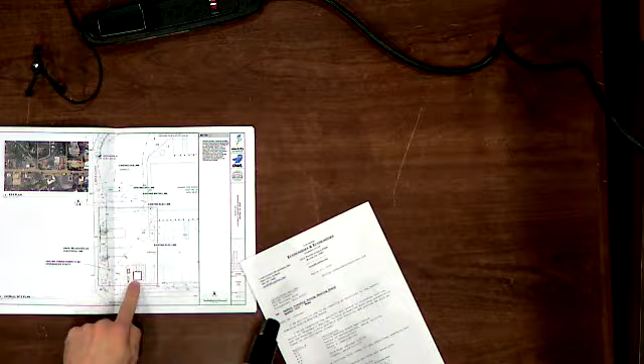Okay, so the gear we're proposing putting in the front of the store. Right now, we're not showing screening, but we could certainly put screening around it. The proximity to the existing transformer makes this the best spot because it limits the disturbance to the public, to the store, and it's the shortest run.

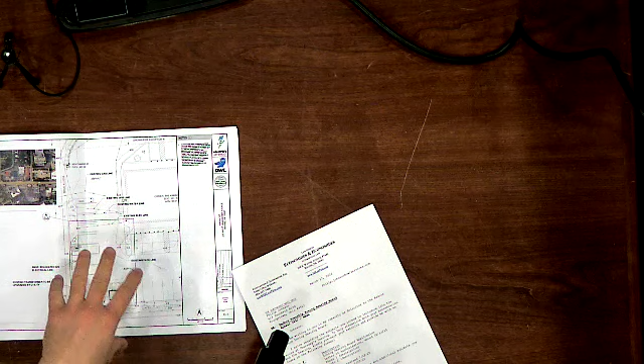I've actually been to this store a couple times. I stopped before. There's no good spot behind this store due to an existing fire lane. People park there, and putting it in the back of the store would disturb the fire lane and the flow of traffic behind it. Wawa has chosen these two spots because they're underutilized and they're in that corner.

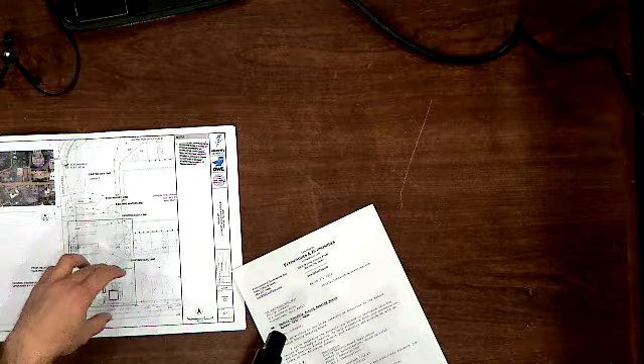That's what they told me. Describe anything about that parking lot as underutilized? Like I said, I've been there twice. It was not on peak hours, so forgive me if I misspeak on that.

But they're looking at it as adding an amenity. We don't have any proposal to put electric vehicle parking only. They're not going to really enforce that. But obviously, they want people to utilize it for a charge.

When you say they're not really going to enforce it, are you saying that if somebody pulls into Wawa and pulls into the charging station but isn't going to charge their car, just going to go in and buy coffee, get a hoagie, buy milk, whatever else they have in there, you're not going to boot their car or tow it away? No, they're not going to call a tow truck. They're not going to boot them. They're not going to ticket them. They can't ticket them. It's just courteous.

I've parked at them before and ran in the store and been out in 5 minutes. So no, they're not going to put electric vehicle parking only on those. Would they want them to be? Probably, but it's not going to be enforced.

So we do understand that because they're not standard stalls, you're losing existing stall count. But the big stall count loss is from the new transformer and the new switchgear. We've looked at other spots on the property. On the other side of the store, you have that shared driveway access, and you would create a queuing issue, and it would not be good. We've looked at this area, and due to the underground conditions and the fire lane in the back, this is the best spot for these chargers.

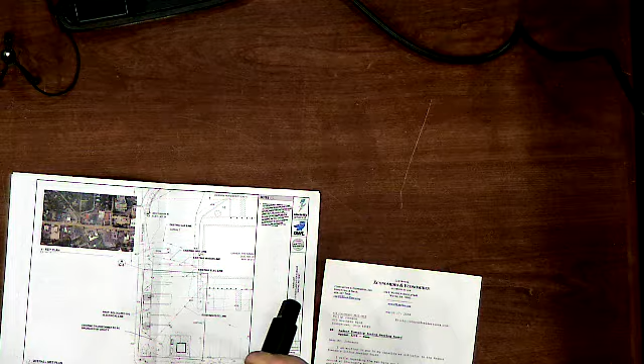So I know we haven't identified any exhibits yet, but on the plan you have open on the table, can you show me where the existing building is in relation to these parking spaces? Here's the existing building, and the main entrance is on the east side. Is it marked on the plan? No, the drawings are inadequate.

I have another question, but I'm going to move on. I have a feeling you're going to need a continuance, but again, we can't give you advice.

Are you going to be able to address the volume of vehicles and how the loss of 7 parking spaces is going to impact the project and the use of the Wawa? I don't know where we could put more spots because of that fire lane behind the store. I understand you're capped out, but that doesn't mean this project just gets granted. And I think a relevant question I certainly want to know the answer to is the loss of 7 spaces.

What's that impact going to be on the Wawa? As it is now, you go in there at 12:30, there's nowhere to park. You sometimes have to sit and wait so that you can go in. So if you're not prepared to address that... that's up to you, we can certainly proceed.

At this point I would definitely like to request a continuance, because, like I said, the gentleman just left the company. I had to pick this up, and without giving you any advice, there's issues with the material and the presentation and what you need to do and what you need to prove to show that you're entitled to a variance, okay?

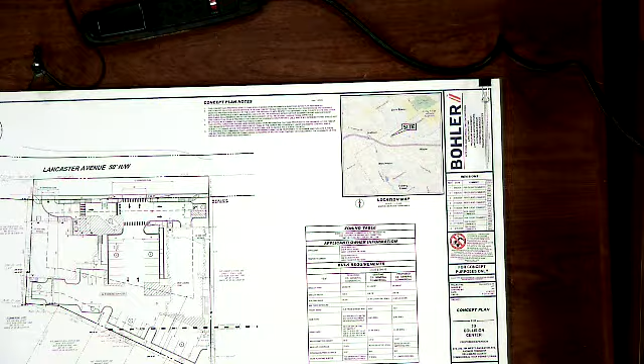Exhibit A1 is an aerial of the site. Our property, the 3 separate properties, are located on the southern side of Lancaster Avenue. The existing auto repair shop is shown as 3D Auto Body. There's a retail building in the middle, and to the right of that is the former restaurant building. The retail building and the restaurant building have been vacant for about the last 10 years.

The auto repair, as our client has owned it, has been there since 2011, I believe, but as previously mentioned, it was used as a motor vehicle repair shop prior to that. They had received a variance back in the 80s to do a small expansion. What we're looking to do is basically a facade upgrade to the existing motor vehicle repair shop, demolish the middle retail building, and renovate the old restaurant building to locate some of the motor vehicle repair services there.

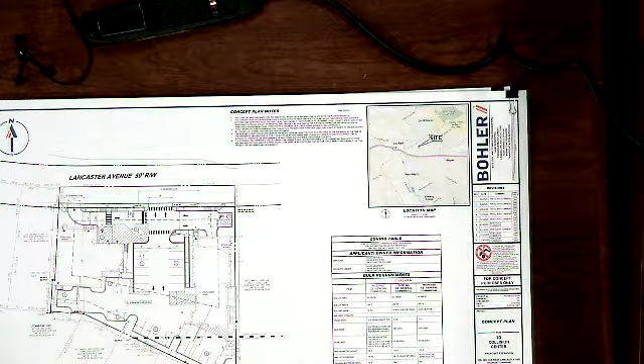Exhibit A2 shows the existing conditions. Exhibit A3 is a concept plan that shows the proposed development. Exhibit A4 is the proposed elevations showing what the new buildings will look like, with a dashed overlay comparing it to the existing building in terms of height. Exhibit A5 is the proposed floor plan. Exhibit A6 shows the proposed rendering as compared to the existing conditions today.

Exhibit A8 are photos that were included with the zoning application package. Exhibit A9 is a transportation impact assessment, done in anticipation of us submitting a land development application for the project. Exhibits A10, 11, and 12 are the CVs for our experts, so you can reference those if you need.

Going back to A1, I see you've got the 3D auto body shop identified, there's a small store, or what was once a store next to it, and then there's the old restaurant. And then next to that, is that another older building attached to the restaurant, what had been the restaurant? There is another building, but that is not on our site.

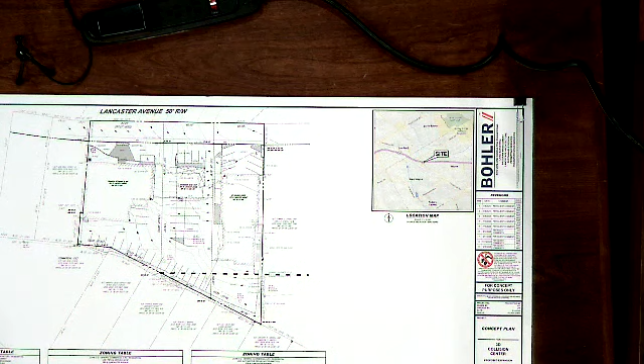So the existing conditions plan is the first plan prepared. This shows the 3 parcels, all the existing conditions, the existing zoning calculations for the property. The second plan, which we'll get to in a little bit, is the proposed site plan, which shows the consolidation of the 3 lots, the removal of the building in the middle, and then the reconfiguration of the site proposed along with this application.

And you're familiar with the properties and the general operations of the existing business, correct? Yes. Can you now identify and describe the existing conditions? Sure. So I will start from my left and go to the right. The property on the left is the 384 property, the vacant restaurant building.

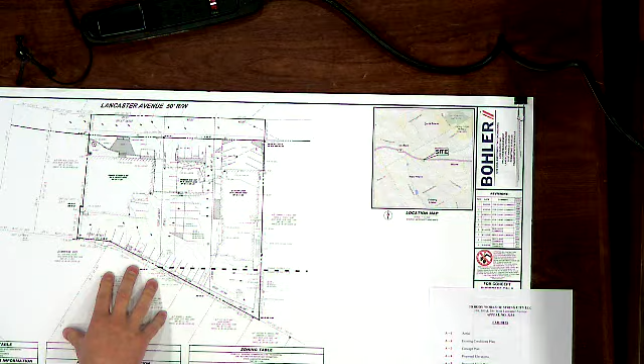All three of these properties have a series of nonconformities, so I'll go through them one at a time. 384 is nonconforming for lot area, lot width, building area, side yard, rear yard, lot coverage, and the rear planting buffer. In addition, parking in the front yard, loading area, parking space dimensions, and number of parking spaces. Those are the current deficiencies for the 384 lot.

The 380 lot, which is in the center of the site, is the vacant retail building. This has a few less nonconformities, but is nonetheless nonconforming for lot area, lot width, side yard, lot coverage, rear planting buffer, parking in the front yard, loading area, and parking space dimensions.

And similarly, 378, which is the existing building that 3D Bodyworks operates currently, is nonconforming for lot area, lot width, building area, side yard, rear yard, lot coverage, rear planting buffer, parking in the front yard, loading area, parking space dimensions, and parking count.

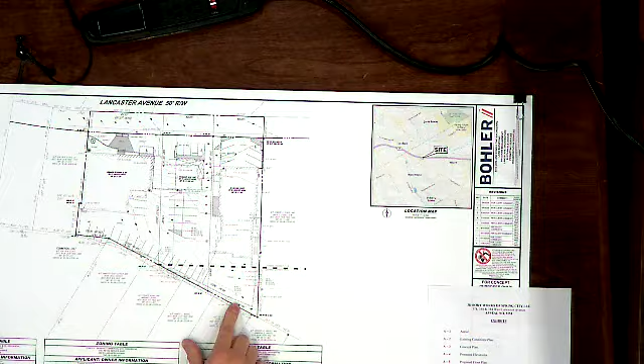Can you now describe the proposed conditions, including the consolidated lot and the proposed improvements, as well as the elimination or reduction in any nonconformities? Absolutely. So, as Jamie had mentioned previously—

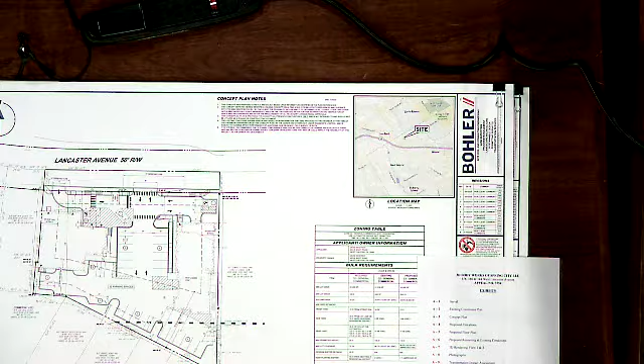So as part of this project, we are also proposing to get rid of that wide open frontage and consolidate it into two defined access points. The main ingress-egress access point is in the center of the property, which would have been essentially where the old retail building is now. And then there's also an egress only, and ingress only, to the left side of the property.

Customers, when they've scheduled an appointment to have their car repaired, would pull in, drop their vehicle off at that office space, and then whatever arrangements they've made to be taken home or have a rental car, those accommodations would be made. The client would leave the site, and then the staff would then take the car and park it wherever it needs to be based on the work that's being completed.

So our traffic engineer will get into a little bit more of the traffic-related items as we go on here, but I just wanted to give an overview of that up front for some background on the access. So with that, I'll go through the reduction in the nonconformities for the site, or elimination.

So the use nonconformity is reduced from 2 to 1. The auto repair use is nonconforming, but there is also a residential component as an apartment in, I believe it's the 380 property, which would be removed as part of this application. So the residential nonconforming use is removed as well.

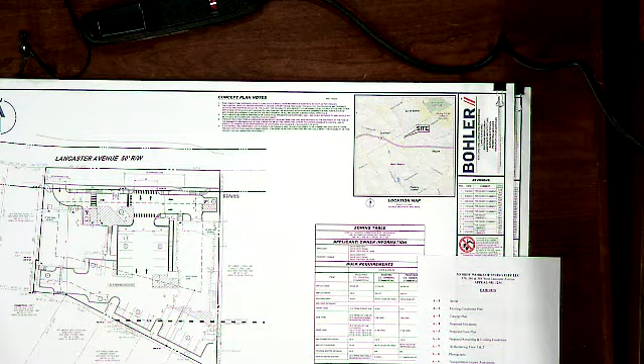The lot size and lot width nonconformities are eliminated by the consolidation. Building area, same thing, is eliminated by the consolidation.

The impervious surface nonconformity is reduced—if you considered all three of the existing lots as one, the impervious coverage is like 96.7%. So the consolidation and improvements here reduce that nonconformity down to 88%.

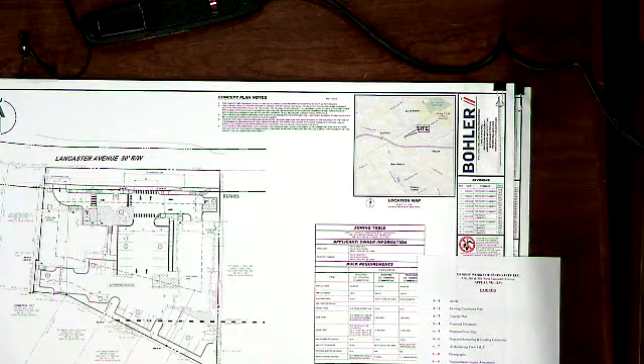The rear buffer nonconformity is reduced. This is something we talked about with the Planning Commission. As it exists today, the parking in the back of the site—I'll just flip to Exhibit A2 for a second. Got both my boards.

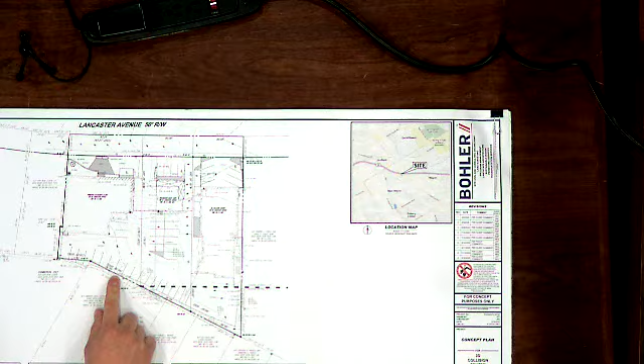The parking in the back of the site kind of ducks and weaves here, but it crosses onto the residential properties in the back, so the parking overlaps. There is really no buffer yard to speak of back there. There is a 15-foot buffer requirement, which is nonconforming in this condition.

What we've proposed to do, based on feedback from the Planning Commission, is provide this: there's going to be a 7-foot buffer that gets provided along the back here. There is a pinch point where the property takes a bend here, which maintains about a 1-foot buffer from the property line, which is less nonconforming than the current situation where it is like 6 or 7 feet across the property line.

The parking in the front yard nonconformity is reduced in both the number of spaces and the proximity to the right-of-way. As it exists today, essentially people can just back straight out onto Lancaster Ave there—there are parking spaces that are right along the right-of-way. So as part of consolidating the open frontage into driveways, it reduces the number of spaces and the distance.

The loading area nonconformity is eliminated—there is a dedicated loading zone that's provided. The parking space dimension nonconformities are reduced; some of the existing parking spaces on that property are currently like 7 by 14 feet for some of them. And the number of parking space nonconformity is reduced as well.

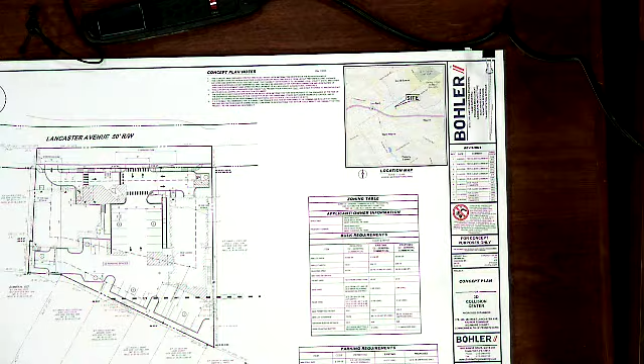I appreciate understanding what the improvements will be, the reduction in the nonconformities. But what I'm really going to need at some point is a comprehensive list of all the relief that you need in order to make this project work. That's not to say you'll get it, but I need to understand what we're doing here as a board.

Right, and the list was reviewed at the beginning. Well, I didn't hear Mr. Yeager mention impervious coverage currently is 96 and some odd percent, and it's reduced to 88%. Do you need relief for that impervious coverage? We have spoken with the zoning officer prior to filing this application because we wanted to make sure we were incorporating everything. I think there were determinations made that stated if we're decreasing the nonconformity, we do not need to specifically seek relief.

But there are things where, in terms of the parking in the front yard, I felt that also is not necessary, but just to be on the safe side, we have asked for it if and to the extent required. So in terms of the impervious, no, we have not specifically asked, but we do have that catch-all where it says any and all other relief necessary. We have not specifically asked for the impervious because it's a non-conforming situation that we're actually making better.

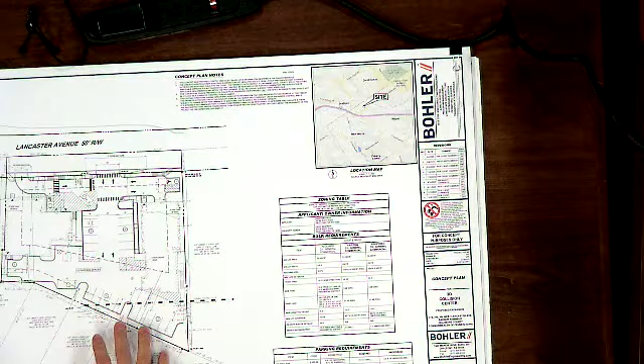As Jamie mentioned earlier, the hours of operation for this facility are 8 to 5:30 or so, so there's no expectation of having lights on in parking areas during sleeping hours.

Were there any other dissenting comments that stood out? No, and actually one of the members from the design review board was there as well, and was pretty supportive of seeing something happen here.

Regarding the parking here and those lights, is there going to be any screening with the rear parking spots given your adjoining southerly neighbors? Yes, that was a comment the Planning Commission brought up. They gave us a recommendation for a certain species of giant arborvitae, but the intent with that space would be to put some sort of fence first along the curb line and then buffer it with arborvitae or a plant of similar species.

Regarding existing conditions versus what's proposed, are you going to be removing existing paving, grinding? Is it basically a full redevelopment? I know you're demolishing one building and renovating two. That's correct, it's renovation of two existing buildings, demolition of one, and then full resurfacing as well.

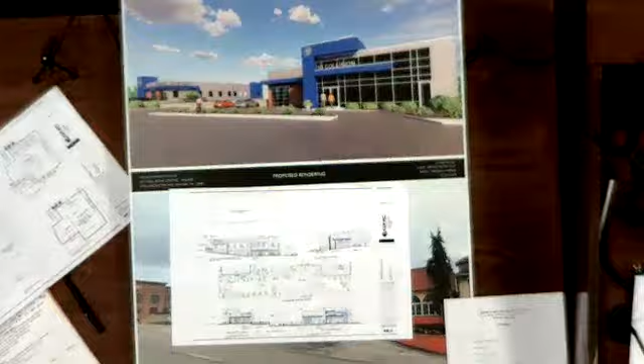Okay, so this is an elevation drawing, exhibit A4. This is a view looking at the building as it stretches out the entire site across Lancaster Avenue. The building on the left is the shop building, which gets reclad, and I'll go through the renderings later. Basically you can sort of faintly see the dotted outline of the building that's there with the little mansard roof on it. So we're about the same height as what was there, a little bit higher at the tower.

I think the tower goes to, I think it says 30 feet. The building in the middle, of course, is removed, and that becomes a landscape area and access in and out of the site as it steps down. On the right-hand side here, this is the proposal for the new building that will be where the restaurant currently is. That building will also look very similar to the cladding on the shop building.

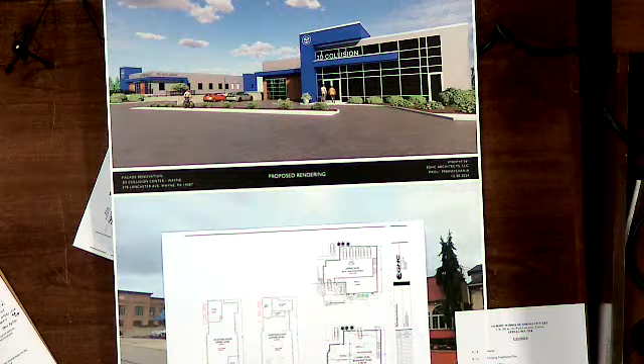So this is the floor plan exhibit, exhibit A5. This building on this side is the existing shop building, and there's a small office here. You park up front, bring the vehicles inside, work on them, take them out. There's a lower level, which is accessed from down below the site through an overhead door, exactly the same footprint as this building above. That will all remain as is. We really haven't done much with the interior at this point, we've just been focusing on the exterior of the building.

This building is the lower level of the restaurant. We are keeping that as is. I'm sorry, over here, we are going to remove this corner on the lower level and the upper level to provide more room and parking and ingress egress up above. We'll reinforce these walls, modernize it. The lower level will become a shop and a paint shop. The upper level, you've got about 1,100 square feet, which becomes an office space. Stair going down, egress out the front, and also vehicle storage for 5 or 6 cars.

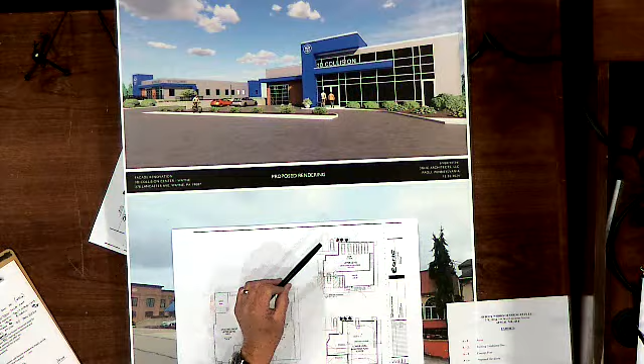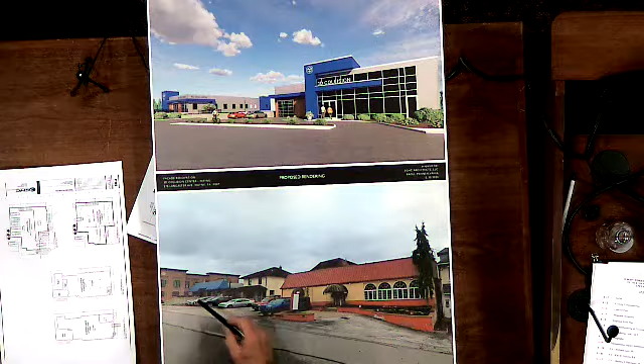So is this the before and after? Okay, so this is exhibit A6. Obviously this is the front view of what's existing. So this is the shop building over here, this is the retail building, I guess it was an apartment above, being demolished. That becomes a new ingress, egress into the back of the site.

This entire portion of the restaurant building will be removed along with these planters. It's in terrible condition right now. And so this building ends up looking like this. It'll be clad with an aluminum composite material, glass curtain wall.

There's a glass overhead door to bring the vehicles in, entrance into the office area for the public, short-term parking, handicap parking. This is the area that did contain the house, now gone, becomes a ramp and landscape area. This is the shop building, which currently is this sort of tired-looking brick building with this blue mansard front.

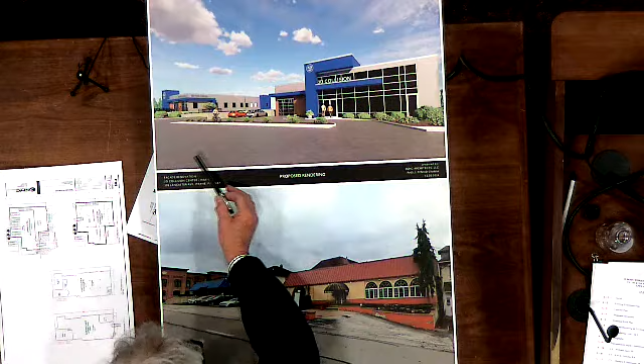Once again, it gets clad with Alucobond panels in a couple of different colors. This is sort of a wood-looking material. We'll get a little bit more planting, some railings, new windows to modernize it, and that's about it for that one.

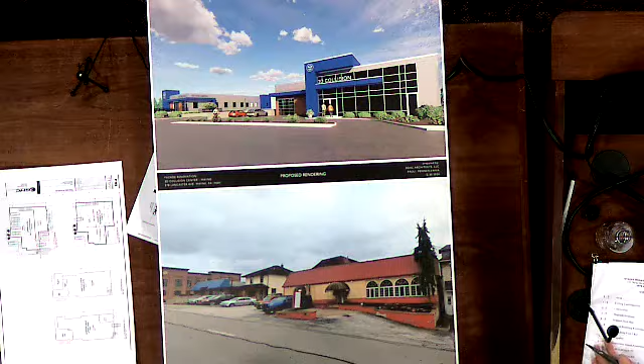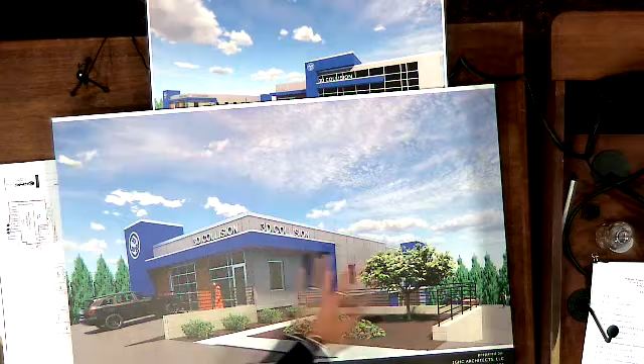So that's where the old mansard roof was. This was the kind of tired brick siding. And these are the new building cladding, tower element, signage, synthetic wood entrance, new glass door to enter the garage, new storefront for the entry into the office area. This space we picked up here will become a landscape area with a railing looking down below.

And I believe that view, too, is the same as what was on top of the proposed rendering and existing conditions, right? Yes. So there's just a question regarding the signage. You don't need any relief on the signage that's been discussed? We are not at this time. It's sort of a struggle as to how much you fully design and all the approvals you get. So if there is any relief that is required for the signage that's being proposed, we'll have to come back.

Okay, understood. Just to touch on that briefly, we've lowered these signs. This one has been lowered to this element here. This one is already, so these signs don't go above 15 feet.

What exhibit is that drawing? That is the A4. So Carl is referencing A4. That's showing the signage, with exception of this, the logos, which obviously are higher than 15 feet. But we're not here for signage, correct? No. Okay. Because it just happens to look good on here.

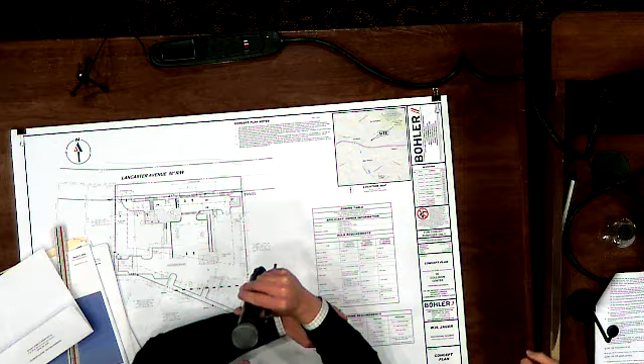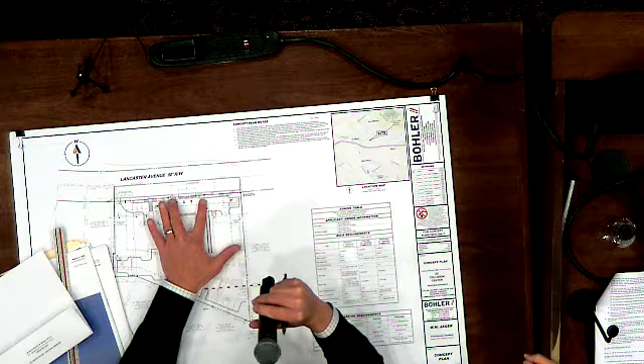One of the things we'll need to do during the land development as well as PennDOT process is show that emergency vehicles can access the site, as well as whatever type of delivery trucks, typically vans, can enter and exit the property. You'll notice this main access point has been designed as a driveway apron, which allows us to flare the radii out to give more room for larger vehicles to enter or exit the property without encroaching in opposing lanes of traffic.

But it is something that we'll need to show during land development. We'll need to have it reviewed by the fire marshal.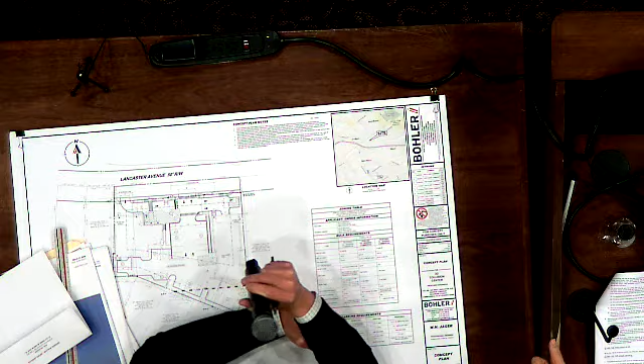Okay, understood. Yeah, I'm just thinking, given when you're proposing to expand the use, because I'm sure with an auto body shop you're having paints, solvents, other flammable materials that I'm sure are appropriately stored, of course, but just considering my thoughts is like getting fire trucks and other—It is, yes, sorry, I just wasn't close enough, thank you.

So I was just thinking in terms of the stated use and materials stored, especially the proposed expanded use here, just given access for fire trucks and other emergency services, but understood that would have to also go through a further process and revision.

No, yeah, good question. And as I said, if we're able to move forward to the land development process, I'm sure the township's fire marshal will review the plan and make sure they're comfortable with how it's designed, and if not, we'll have to make revisions. Understood, thank you. Thank you.

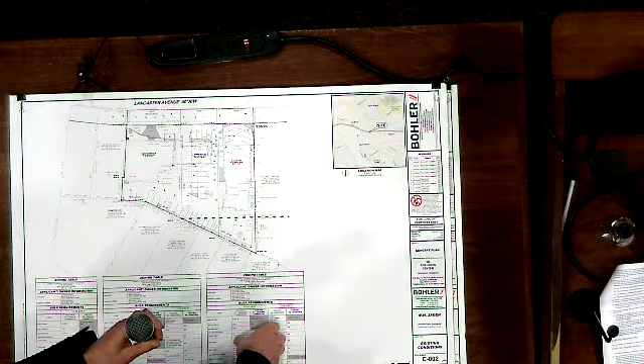So today there are 4, 5, 6, 7, 8, 9, or 10 parking spaces that are in that 20-foot setback that have direct access to backing out into the right-of-way. And you're reducing that then on A3 to just one spot in that 20-foot setback? That's correct, yes, the ADA stall for that building.

Yeah, so the auto body use, that's permitted? That is a non-conforming use that has existed for a long time. Our client, the applicant, purchased in 2011 and has continued that use. But again, because it's a use that has been there for so long, there is a great need to modernize.

And I just want to be clear - yes, and I'm sorry, I don't mean to be short. We've got a huge agenda tonight, I know. So, okay, so the auto body shop is an existing non-conforming use. That's correct. And you're looking to expand that existing non-conforming use into this restaurant building. That's correct, but the restaurant was a permitted use. That's correct.

Okay, and I'm sorry, it's going to be duplicative, maybe I took a note. The existing non-conforming square footage was - I don't remember what the number was. For which building, the restaurant? No, the existing non-conforming building. Okay, Will, do you have that?

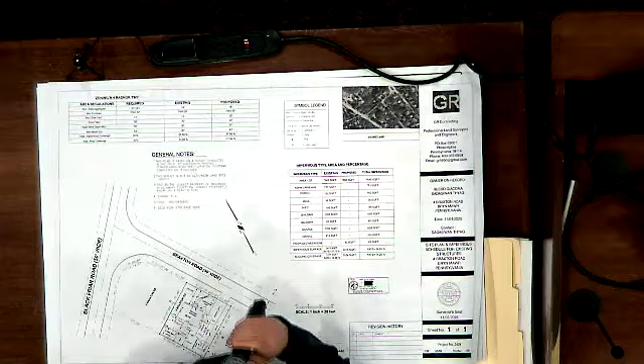Okay, sit down and do that, and we'll call the next one. How's that? I'm not sure exactly what you mean. Meaning you have all of the pictures and the testimony and everything there, so.

We do, but you're under oath to testify and refer to the exhibits you have to explain and justify why you deserve the zoning relief you're requesting, and you do that by referring to the various exhibits, including this drawing and the photographs. I think you were sitting here when you saw the other applicants doing the same thing, correct? I did. I don't have those exhibits here. I have given them to you, and they're in the PDF. So I apologize.

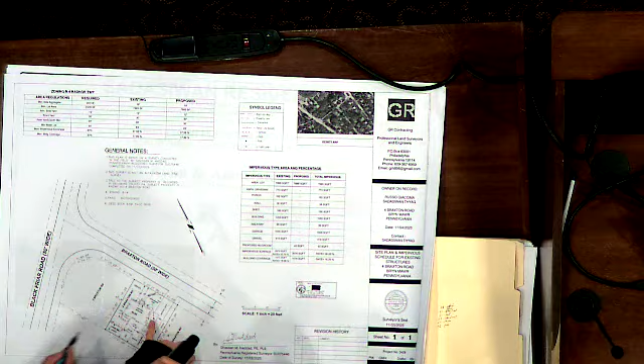Yeah, are you able to see that? That's really small. The numbers above it, parentheses 12.6, parentheses. So it's sitting right above. That's just a marker for you to see what I'm talking about. Okay, you're right in, okay.

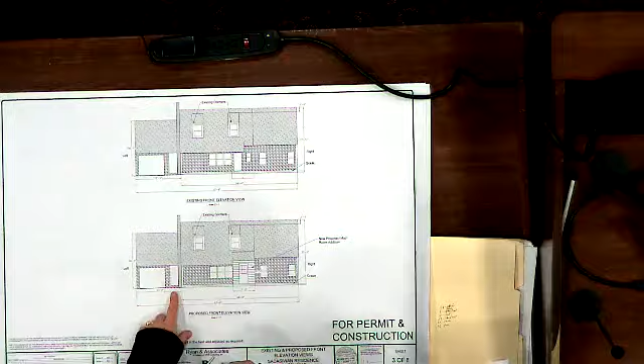It's right here, right? Is that shown in any of the photographs? I was looking at the photographs which we've marked, but I'm not sure what we marked. I really don't see anything that stands out. Actually, it is shown here. So if you look at where, I don't think we have that plan.

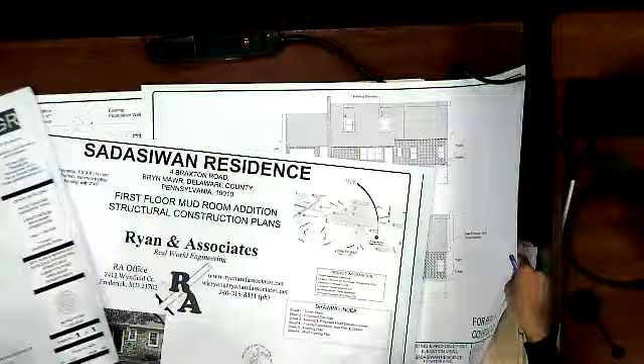Do you have that, do you have an extra copy of that plan that you have up on the screen, so we can add it to the file? If you have a copy for us... This is the construction plans I brought in case we needed them.

If you'd like, I can show you where. No, we need to see this. We need to see what you have down there, so the questions that have been posed by the board can be answered. So I would suggest you pass that up, or leave it on the table so we can see it on the screen. He only has the one copy, right? Correct.

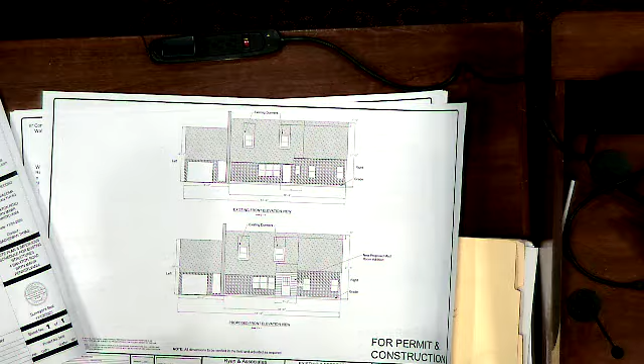Where did we mark this? A7. So I see you're indicating that... okay, so that door is on the front of the house then? Correct, next to the garage door. Here's the existing door, the existing front stoop with the proposed new mudroom.

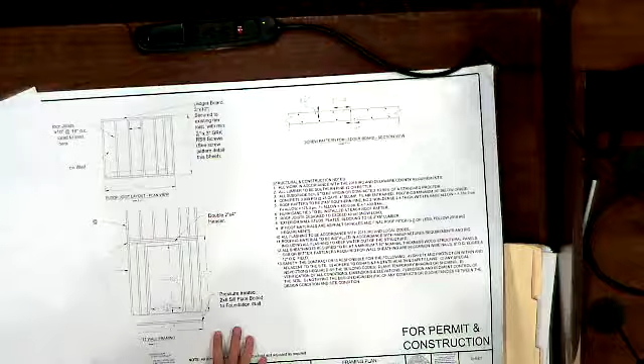And the proposed mudroom addition is this 6-foot by 7.2 feet extension? Correct. And the front yard setback required is 30 feet, is that correct? Correct. And you're proposing to go to 24 feet? Correct.

I don't have any further questions. Any other questions? Okay, sorry.

Do we want a copy of the drawings that we don't have? Yeah, we should have A7 up here, just that one sheet. The construction plans—I don't know if you need the whole set, we only reference that one page. Right, the one page, okay. This one? Yeah, so we should make that A7, but we'll need that for the file. Okay, thank you for your help.

Want to take us through the packet of photos, just briefly? Yes, put them on the table.

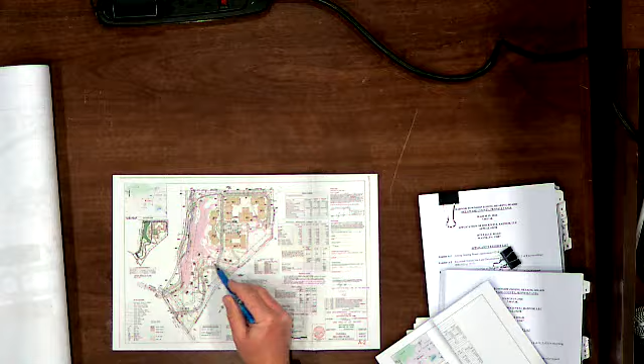Are you and others at your firm spearheading the construction of the proposed life care residence that's currently underway? We are. In addition, we're also general contractors, and we are subcontracting some of the work, the site work, to Brubacher Excavating, and then some of the independent buildings we're also going to subcontract. And what phase of the construction is underway right now? If you can see this map here, we started the spine road right up to about this area, and it'll take us approximately until sometime in May, June to get to that point before continuing with additional development up the hill.

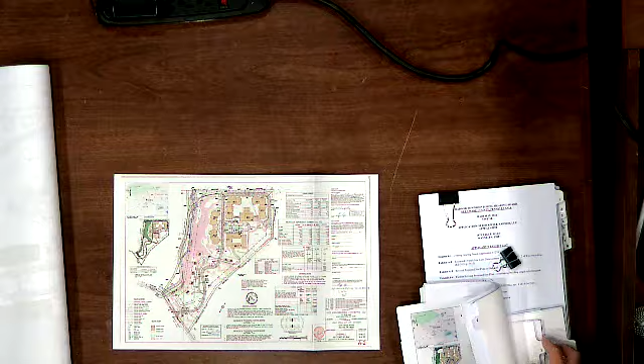Have you and your team been engaged with design professionals and other experts to refine the plans for the proposed life care residence? Yes. And is that what brings us before the zoning hearing board this evening? It is. At Exhibit A3, I'll put a copy up here. Is this the plan that we filed initially with the zoning hearing board for this application? It is.

Have these plans been revised, particularly this upper part of building H1, to make it comply with the 160-foot length requirement? Yes, it does now. So we're essentially substituting that plan with A4, is that correct? Yes. And this plan is basically the same, except building H1 has now been revised to meet that 160-foot length requirement, correct? That is correct. So the only relief we're seeking is regarding the steep slopes, which Mr. Lambert will be talking about, right? Yes.

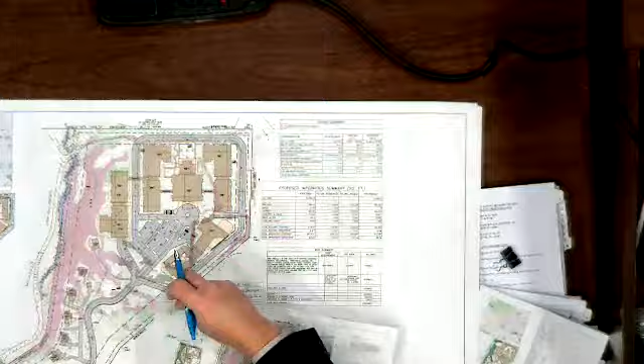Using this plan, A4, would you describe the proposed modifications to the previously approved plans that have triggered the need for the steep slope relief that's now being requested? Yeah, I'm going to start with the previous plan that was approved, which is A2. This shows, as you drive up the main road here, there will be independent units here, an amenity center here, and some independent living units here.

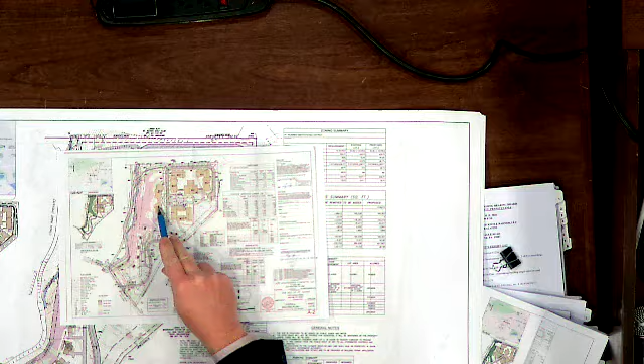And then this area was going to be for more of the health care, for the personal care and memory care building. The feedback, we feel like we've hired some of the best experts in the industry, and as we were developing this plan 3, 4, or 5 years ago, we didn't know exactly how the different buildings should be configured.

We've since hired Vantage Point Retirement Services to be our operator for this project, and based on their input and input of many others, specifically also our architect, they said that as you come up here, we really should be moving this personal care, memory care building a little bit off to the side, so that as you are driving up from a vantage point, you're looking at the amenity center.

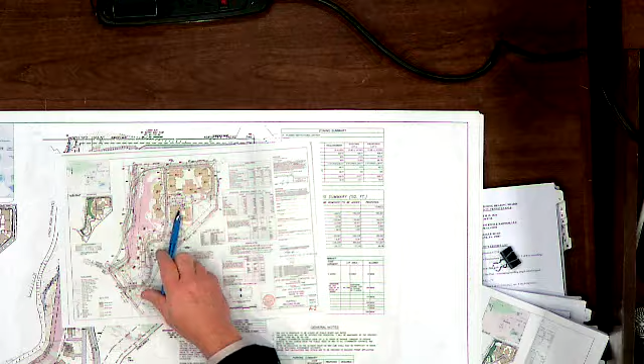So it's going to be certainly a more grand entrance, but in addition to that, this plan currently, as you see it, that we had approved, the road comes around here and it just kind of cul-de-sacs. The feedback that we've gotten from the operators about circulation, and then even some life safety folks, said it would really be helpful to have that road connect.

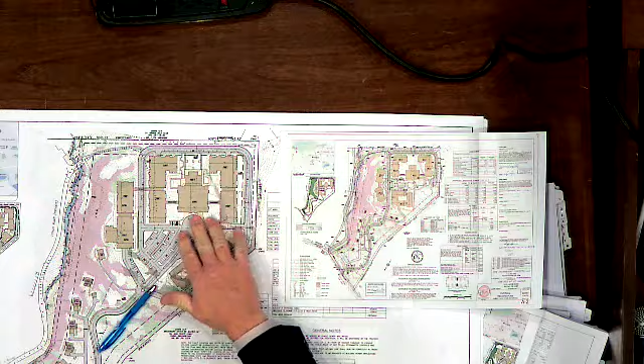We're looking at nothing changes. Now you're back to A4. Sorry, now I'm back to plan A4. And as you continue up this road, really nothing changes until you get to this point where we have slid the personal care, memory care building over, and you're looking more at that kind of grand entrance of the community. We feel this is really needed for this luxury product that we're building.

And then you'll see here that it helps with the circulation that this road now connects. And in doing this, we interrupt where there used to be a swimming pool here, and there used to be a home here that was graded off. Rob Lambert will talk about the steep slopes.

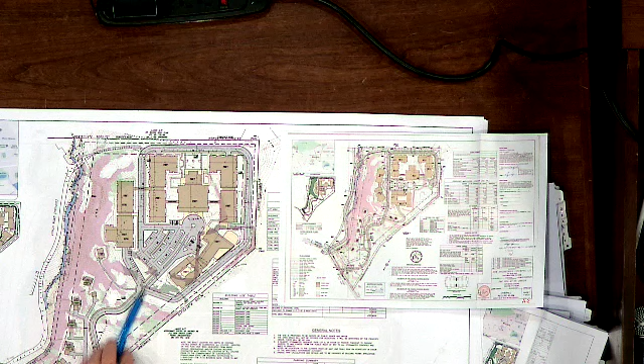Was this plan presented to the Radnor Township Planning Commission for review on March 2nd, 2026? Yes. And did the Township Planning Commission vote to recommend approval of the requested relief? Yes. That's all I have for Greg at this time. Rob Lambert will be going over the plans in more detail, and particularly the steep slopes.

I just have a quick question. It actually looks like you've improved parking as well. Is that correct? Correct. Yeah, I noted in the application that there's more parking on this plan than there was, so the extent of the parking variance would actually be reduced.

I just have a question. Maybe this is for the next witness, but is there any increase or decrease in impervious coverage, any issues regarding that, or are we still within the bounds? Rob will answer that. Sure. We should have him sworn. Understood.

I do. Rob Lambert. So the question was on impervious coverage. Yes, this plan continues to conform with the ordinance. Okay, great. Thank you.

Should I move on, or are there more questions for Greg? Okay, Rob, you've been sworn in. In the exhibit package at A5 is a summary of your educational and professional background, correct? Yes, that is correct. And I'm sure the board knows that you're a licensed professional engineer in the Commonwealth of Pennsylvania. I am. I'd like to offer Rob as an expert in civil engineering and land development.

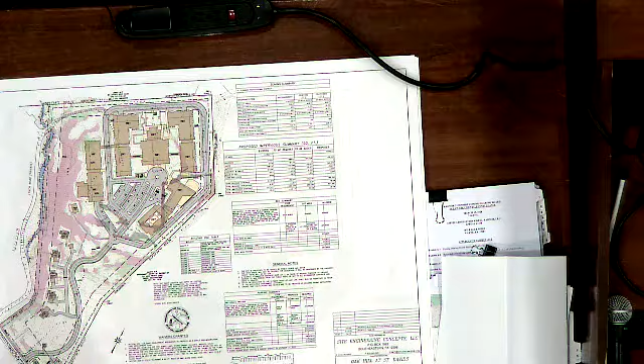Looking at Exhibit A4 on the left-hand side, you can see the blue line going kind of top to bottom of the page, a little bit circuitous. That is a creek that originates up by St. David's and goes down to Eagle Road, which is in the bottom left.

On that left-hand side, you can see the extensive area of pink. That's a steep slope that comes up from the creek area up to the developed portion of the property. The other areas you see sporadically through the property were a result of previous development. You likely had a slope that was less than 20%, but then they put in houses, tennis courts, a swimming pool that we'll get into, and created the large flat areas.

In order to get the large flat area under 20% slope, you created steeper slopes in between. The interesting thing is the Radnor ordinance allows slopes created in conformance with the ordinance, and the way that's been interpreted is post-1978. So if you had a plan that proposed those slopes today, like if Valley Forge had built this in, say, the year 2000, we wouldn't be here tonight because all those slopes could be disturbed. Many of these slopes were simply constructed before 1978, and we don't have plans of them, so we need to seek relief.

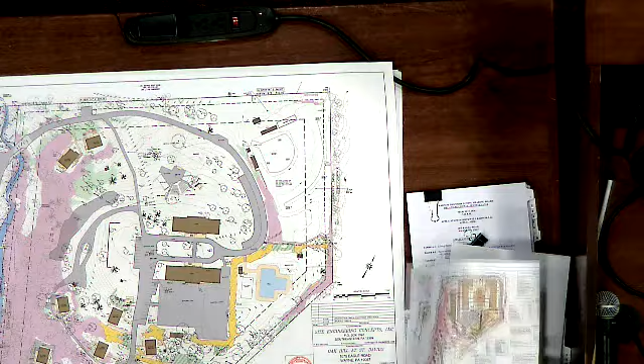Yes, so this is Exhibit A6. This is an enlargement of the previous plan. If we take the top half of that, the top of the page is St. David's Golf Club. To the left is Valley Forge Military, and to the right is Villanova Cabrini. You can see the blue area on the left-hand side — that's the creek mentioned previously. The large pink area to the left is the natural slope that was mentioned. So the brown areas on this plan are the buildings that existed.

Many of these are torn down at this point. The gray areas are existing pavement. There's a blue area to the right, which was a swimming pool, and a tan area surrounding that was the patio around that pool. So what I've done on this plan is taken the pink areas and highlighted the areas where we're seeking relief in yellow, just for ease of viewing. You can see the general areas, and I'll start off with the left-hand side and work my way to the right.

So you can see on the left-hand side, there were two dark brown areas toward the top of the page and the bottom of the page of that yellow area.

And those were two previous dwellings. You can see where they had those dwellings, they created a steeper area in between them to be able to have flat areas for the dwellings themselves. Going to the right, you can see a similar pattern with the two brown buildings, labeled two-story dwelling and two-story dwelling.

There's a band of slope in between those. I'll show pictures in a minute, but that is the same configuration, where right along where those buildings were constructed you have a small band of steep slope.

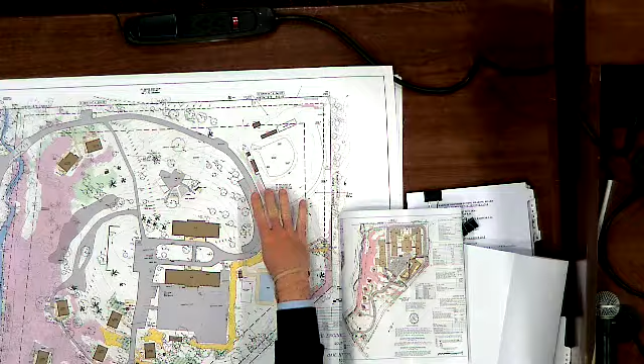I just wanted to clarify that those aren't being preserved - they're just not subject to the ordinance. They're being disturbed, but they don't need relief to be disturbed, correct? Correct.

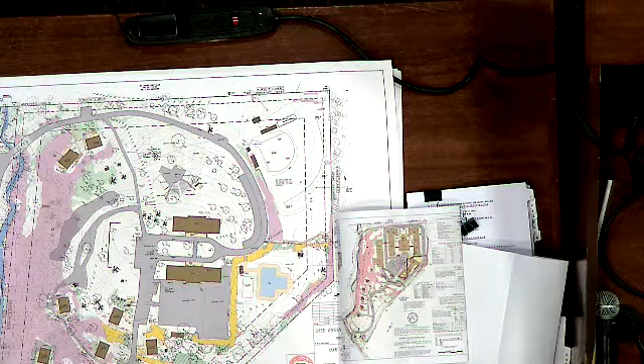So I don't know if we're going to get into pictures. Yeah, at Exhibit A7, did you assemble some old photographs and some new ones to be representative of some of these areas of slope?

Yes. Go through them, referring to each exhibit number please. So I think I actually did these right to left now that I look at them instead of left to right, so I'll kind of go backwards.

So the first picture is Exhibit A7A. This is an older picture from when we first started working on the project. This was taken standing in between the two longer brown buildings, looking toward the swimming pool. You can see the swimming pool that's fenced in - it's empty in this photo. You can see the set of steps in the photograph, and the roof of the building and the side of the building to the right.

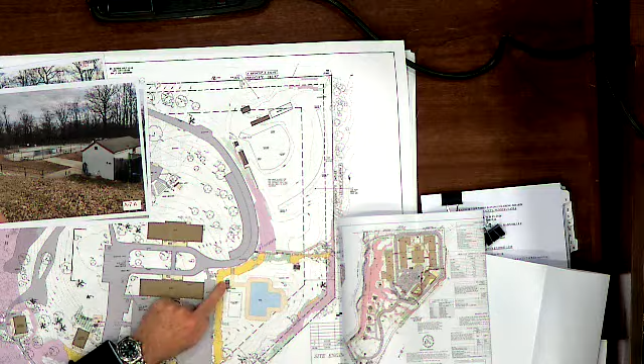So on the plan, Exhibit A6, you can see the dark brown building, the set of steps going from the gray asphalt area down to the pool area, and then you can see the pool. In between the building and the asphalt, you can see that's the slope that was there, and the steps that were in that location.

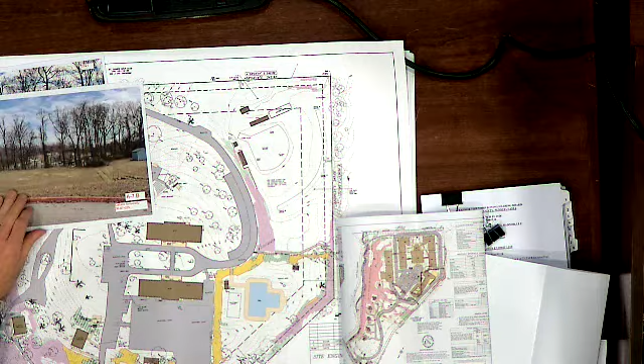Going to A7B, this is standing on the pavement as it makes a left-hand turn. So if you're going between those buildings, heading east toward Cabrini, you're standing there looking out toward Cabrini. If you look out in the distance, you can see the Dixon Athletic Center, and there's an athletic field there on the Villanova Cabrini campus.

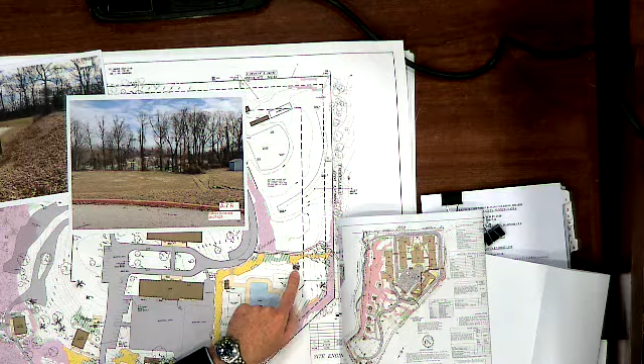Let's get those more in - getting off to the side there. Oh, there we go, sorry. So you can see there's this small area where they had a shed and then the outfield of the softball field. In between those two areas, that was the band. You can see the brown shed on A6 - that is the small band of slope in between there, in between the large flat area of the softball field and a flatter area out beyond the pool.

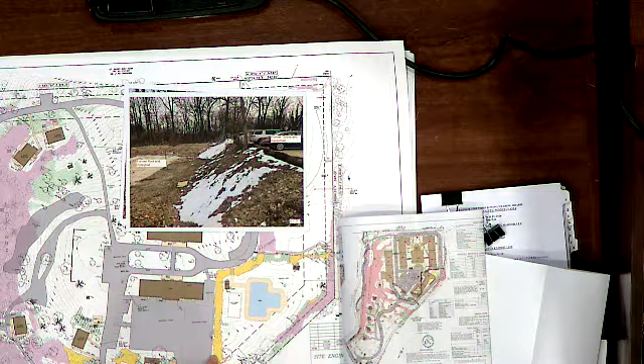A7D was a recent photograph - you can see snow in the picture. This continues walking down the slope, closer to the corner of the basketball court. Again you can see the former basketball court and the volleyball area on the left. They flattened out one area and made the slope, maximizing the flat areas for recreation.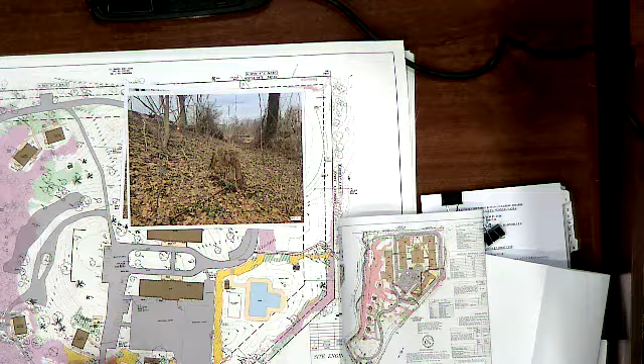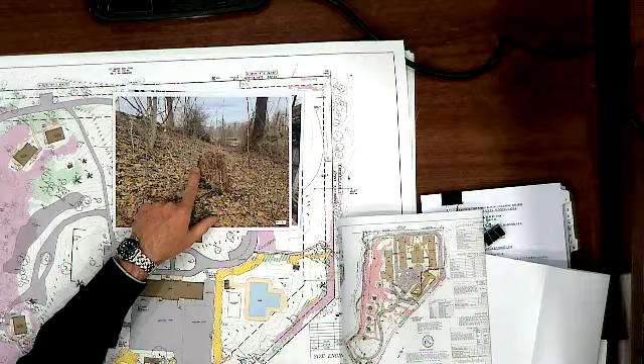This picture, A7E, is actually interesting. This was standing at the corner of the basketball court looking back toward the swimming pool. I used this photograph because you can see the tree stump here - it's been dead for a while and gone. But you can see where they just filled right along where that tree is. The root flare is on the right side of the tree, and it's buried on the left side, likely why the tree died, but they filled that slope, wrapping around where the basketball court is.

The next photograph, A7F, is a little hard to see. This is at the bottom of A6. You can see a series of two-story dwellings in a line - these are buildings that haven't been removed yet. I had to point out where the steep slope is because you can't see it well in the photograph. It's just a small area right next to the building - they cut out the slope as it went down the hill right next to the building to flatten the area for the building.

I think that was our last photograph.

Given the plans that show those slopes on the old Valley Forge Military Academy campus and the photographs you have shown, in your opinion, are these man-made steep slopes? Yes.

Roughly how large are these areas of steep slope? All these areas are about a third of an acre - I think it was just over 14,000 feet of slope area. Is that number contained on Plan A4? Yes, in the bottom left-hand corner of A4, the 20% slopes are identified.

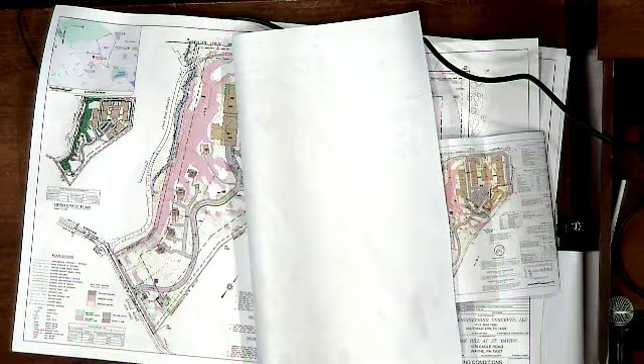On the bottom left-hand corner of Exhibit A4, there's a steep slope analysis table identifying the 20% slopes. Overall there's just under 200,000 feet of 20% slopes. We're proposing disturbance of 14,644 square feet, which is about 7% of the slope area on this 23-acre site. So with the site being 23.85 acres, you're seeking to disturb only about a third of an acre of slopes? That is correct. And those slopes, I think it's pretty clear, were constructed when they constructed the improvements.

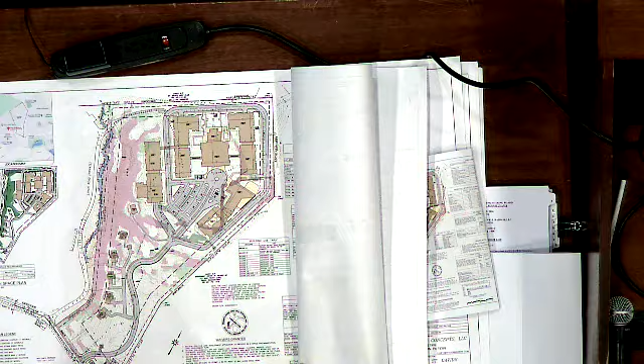At Exhibit A9, we just put a copy of the Township Code provisions about steep slopes, and I wanted to ask you a couple questions about that for the record. 280.112 are the slope control provisions. Are you familiar with the stated intent of these provisions at 280.112.a?

I am. And in your professional opinion, will disturbing the man-made steep slopes in question violate the intent provisions of 280.112a? They will not violate the provisions. With our improvements, the first intent was to limit erosion and sedimentation.

Actually a steep slope is more likely to erode than not - a flatter area won't erode, but a steeper area will likely erode. Our improvements include pavement and permanent stabilization, but we're also building stormwater management to protect watersheds and limit increases in stormwater runoff. This site had very limited, if any, stormwater management controls before development. We'll be installing extensive stormwater management, which will protect the watershed and reduce stormwater runoff.

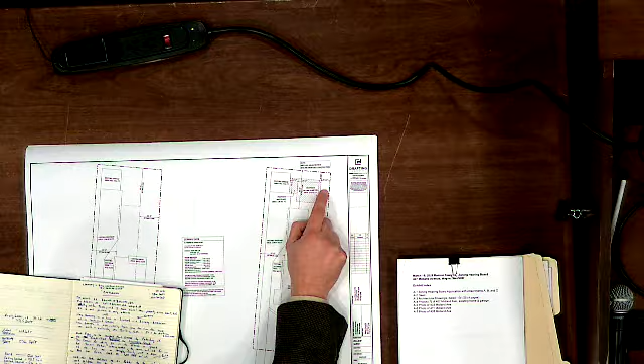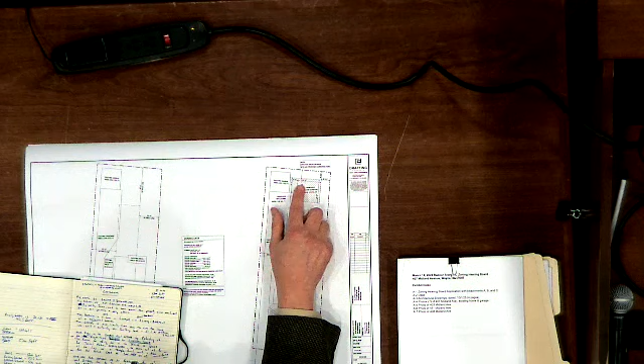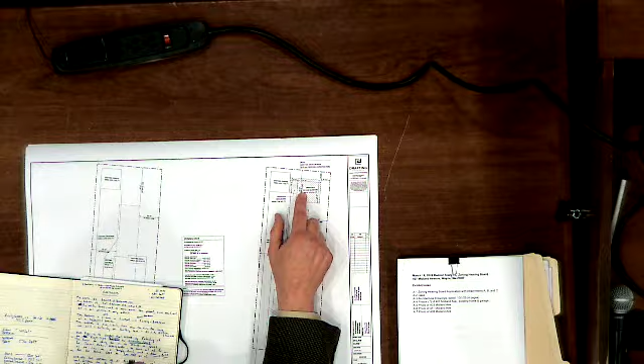What ultimately happens is that we approach this side of our property line, and the 10-foot setback would actually be 8 feet and 11 inches as represented. So we're effectively asking for 13 inches of space into that 10-foot setback. The reason is that the space we're building, with Nancy in mind and caregiving in mind, needs to exist comfortably, but also accommodate ADA regulations so future caregiving, wheelchairs, etc., can be made possible. It optimizes the space a little more. Those 13 inches make a big deal when you start to build, as I'm sure everyone is quite aware.

I can pause there for a second — I would otherwise go into the need for the stove. But I'd like to say that we view this as an extension of the home we live in. We are looking at it as extending our family. It's going to be the same address, the same utilities, all one family. It's an integrated space.

I have a few questions for you before the board addresses any additional ones. Do you feel the proposed change in expanding the structure negatively affects the neighboring properties? I would say no. The property from our perspective is represented here. On the back side, there are no residences, it's a parking lot. To the right of the house, though not represented here, it's effectively adjacent to our house, and this whole area is open. The structure we're extending is not disruptive, I would say.

Do you feel the proposed change will impact the residential character of the neighborhood? The design we have, which we can show here, we don't believe so. We took this through the HARB, the historic board, to go over things, took in their assessments, and we have their approval.

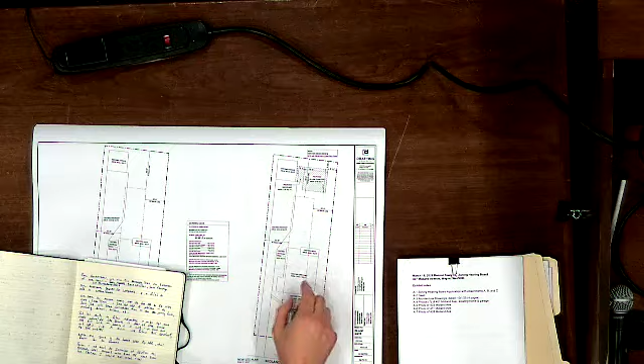Did you consider building off the back of your house rather than going all the way back where the garage is? The thought was twofold. First, the character of the house as it is, we like to preserve. Second, it has to do with the neighbor question. The lot is so narrow, we'd actually be more disruptive to the neighbors there. Meanwhile, the back of the property is quite nice, and the garage is itself quite nice, and we think we could make it a nice extension. It gives Nancy a little bit of her own existence when she wants to spend time separate from being in the house with us.

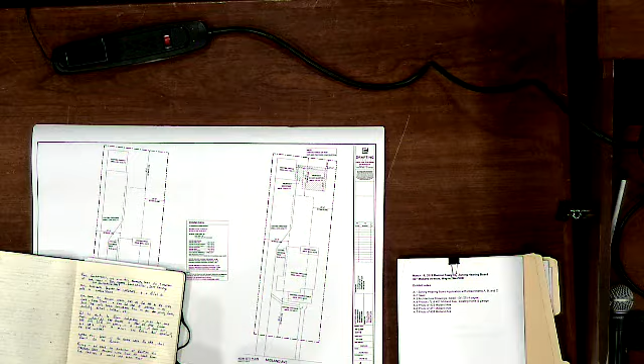Have you spoken with any of the adjoining neighbors regarding the proposed addition? We have spoken to a few neighbors, including the neighbor to our right, so they are aware. There was no negative reaction. The neighbor to the right at 411 is supportive. Also Kathy Agnew, our commissioner, is supportive. They've actually both said they wish their kids would do this for them.

Yeah, that's what I didn't want to say, so she heard that. I heard that directly. I'll let Kathy know. I thought she'd be here tonight.

It's late, I don't want to make a big deal about 13 inches. Yeah, I agree, it's de minimis. But can you explain to me how that impacts, and why not just reduce it to 13 inches and avoid this?

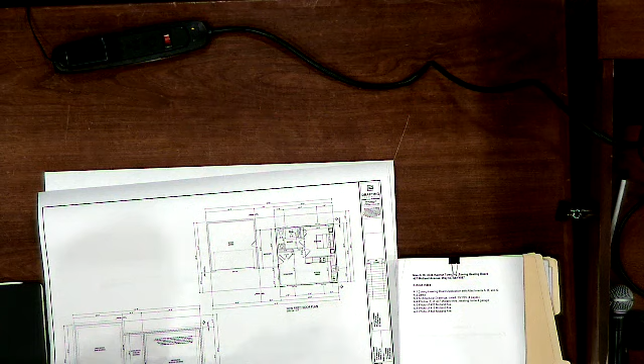I just think it's an opportunity for comfort. That's how I view it, and it makes the options for the ADA areas just slightly bigger, and it allows Nancy to have that much more comfort. It seems just so small, but those inches count in living space. I feel like that square footage is a lot bigger number suddenly for her.

Understood, and again, I don't want to belabor 13 inches, but for instance, I think this is part of A4, right? Yes. That breezeway, can you explain what that is? Why not make that 13 inches? I think we'd be more slim, and then you don't need relief. Understood. It's the space between that and the garage, again just trying to create some level of comfort from whatever's happening in the garage itself during that process. I just think there's some sensitivity to that as well.

And we intend to use that for additional storage. We would use that space as additional storage for certain, but certainly some sensitivity to the garage, meaning exhaust and things like that, of course.

The indication that there's going to be a stove or a cooktop in there, does that require a variance? How do we deal with that? Based on the comment the zoning officer made and asked to be included in the notice, my suggestion to the board would be restricting this, that this cannot be deemed a separate dwelling, can't be rented, can't be leased, which you've done in the past.

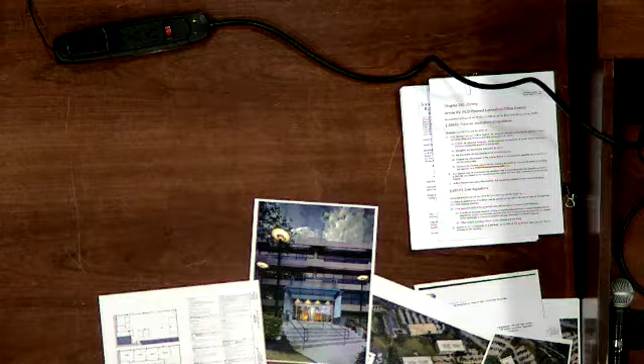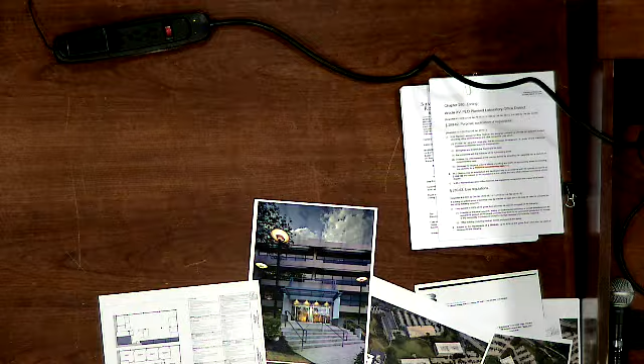This might be a question for Gus. Just trying to figure out, what is the planned laboratory office district? Is it very restrictive? Well, it just doesn't permit this use. It's primarily for what the title says - we have labs in the township, office use, and the PLO combines those two essentially in these types of buildings, but it doesn't permit a daycare.

That's the reason for their request. But it's not like a hard and fast thing - is laboratory like a general term? Yes. Okay, yes.

If there's no more questions for this witness, I'll call the next witness. Great, thank you very much. Sorry, is there one more question? No, no. Okay, you have a representative from the... Brand new, yes.